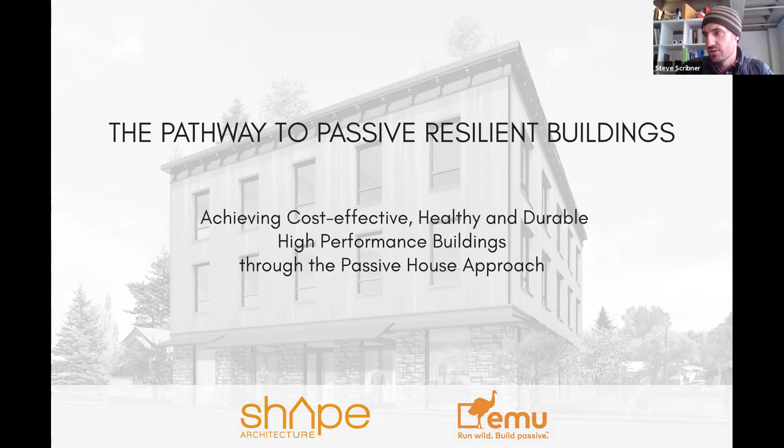So this is actually the cover slide to a lecture I gave with a colleague at Emu Systems. They do Passive House consulting, not architects, but they are trained architects. It was for the AIA last year, and it was really about resilience and durability, not really about energy. So that's just something to keep in mind. I'm going to talk about energy use, but it's such a bigger picture. When it comes to sustainability, durability of buildings is a sustainability tenet. You're not going to have to replace it or replace parts.

So Shape Architecture is Morgan and me. Morgan is remote in Washington now, and he does have another job, so it's basically more me, but he's hopefully going to come back. We have two employees and a lot of active work. This is a little bit out of date, but I'm also a LEED AP. And we're actually up to seven Passive House projects going now.

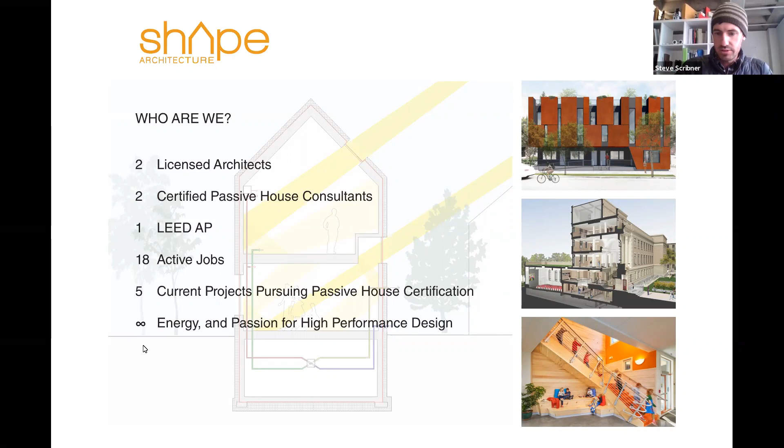So this is just showing a smattering of our building types. There are some of our past projects between Morgan and me at the schools, but we also have a hotel project going in Gunnison, which is climate zone 7, the coldest climate in the continental US, and it's on track maybe to be the first Passive House certified hotel in the US, 18 rooms or so downtown. And then down to tiny ADUs, which is also very sustainable, right? You're increasing density with the least possible material.

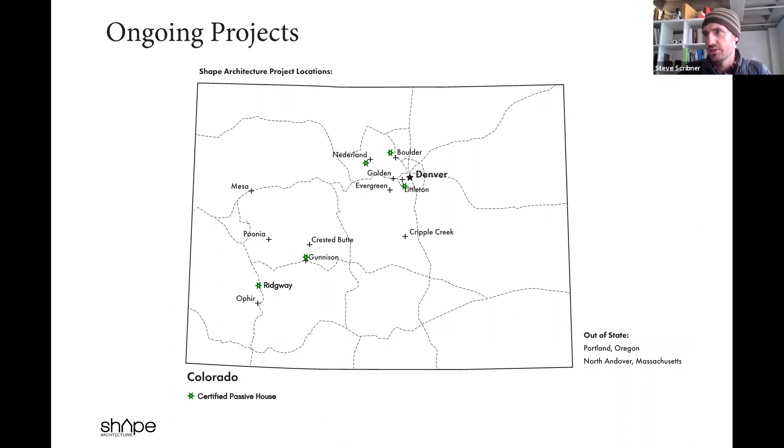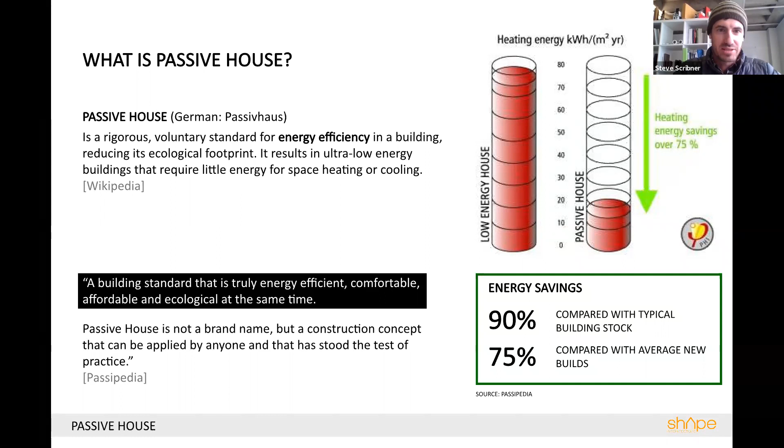And it's a voluntary standard. I kind of talked about this. 90% energy savings compared to typical building stock, like buildings built in the 70s. 75% is compared to code, but it actually depends on the code that's adopted. The codes are making huge improvements. We're already at IECC 2018, which is a little better than 2015, but 2012 was a pretty big jump. So code is getting there.

You can see on this chart that an average existing home uses this many BTUs per square foot. The passive house is down here, pretty darn close to zero, and it's the best way to get to net zero, just a few solar panels. But we're at least halfway there just by meeting code, which is great. There are other issues with code that need to catch up, and halfway is still not far enough.

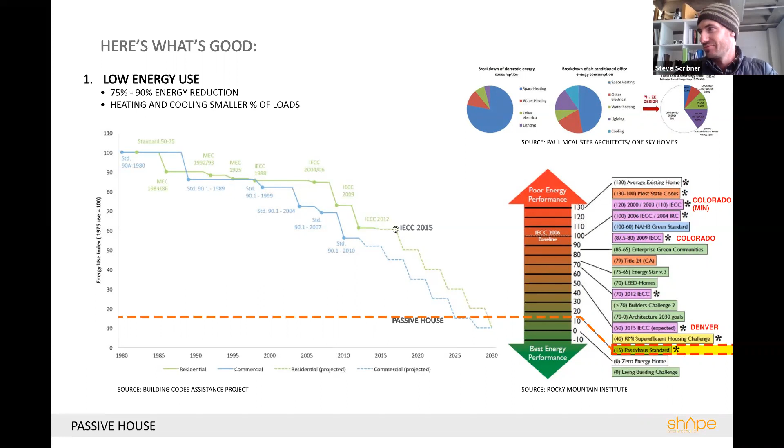So the basic reasons why this is a good approach: the energy use, which we talked about. Number two, though, is occupant comfort. The really good wall assemblies and really good windows mean you don't have local temperature differences. You don't have what's called radiant asymmetry, which is the leading cause of occupant discomfort besides temperature. You end up having really stable temperatures.

So if you're near a window like I am right now, that window next to me is literally 20 degrees. A code window on a day like this would actually be in the 50s. And then you might have a heater going that's much hotter than the temperature you want on a different side of you, or the ambient air temperature. Just because one side of your body doesn't feel the same as the other, it makes you feel uncomfortable. It means you have a much narrower range of comfort.

The other thing that happens is you get a downdraft off of a window if the window is cold, because the cold air drops, and then you end up with a convection loop in a room. It feels like a draft, even if it's not a draft. And additionally, you actually probably have drafts in a typical building, and that's not something that's addressed very well in code right now.

So for a passive house window to be certified, there's a comfort criterion in the standard, so typically in our climate zone you need a triple pane window. The interior surface would be in the high 60s. So if you have a 68 or 70 degree room and your window surface is 66 on a 0 degree day, you're going to feel really comfortable. That's a picture of these kids sitting, touching the window, no frost on the windows.

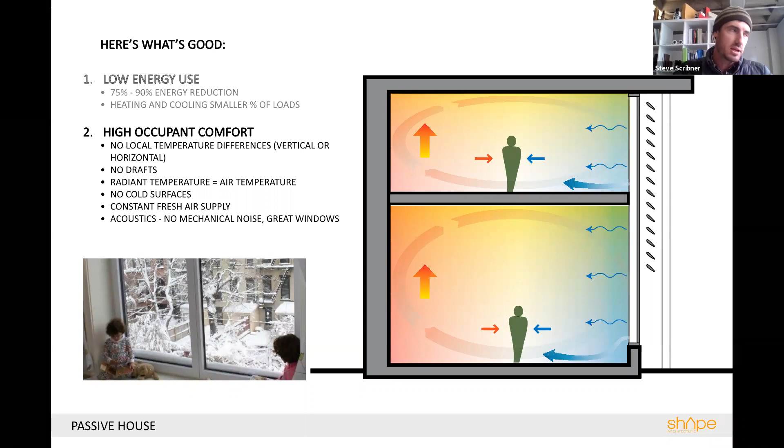And then the energy recovery ventilator also balances for humidity. It's typically more humid inside than outside in Colorado, so that becomes balanced, and you maintain the humidity much better, which is another source of occupant comfort. And then lastly on this list is acoustics. So really good windows, really thick walls, really good air tightness: it's a quiet environment. And if you're near a road, like my office now, it's much more pleasant.

So number 3 is really maybe the most important reason people should build to a better quality, whether or not it's certified passive house. The durability is a really, really big thing. Right now, code is in a bad place because there is a requirement for air tightness, but there's not a requirement for ventilation. And there's also a requirement for a class 1 or 2 vapor retarder on the interior of your wall assembly, which means it'll keep moisture out of the wall in theory.

But they're never built very well. There's no inspections on how well that's applied. And if vapor gets into the wall, it will not be able to get back out. So you end up with a ton of condensation risk. Basically all buildings built right now are gonna have mold issues in who knows how many years, 10 to 20. The other issue is thermal bridging, which we'll talk about. In this case, there's steel studs in the wall that you can see there, and they're bringing cold in from the outside.

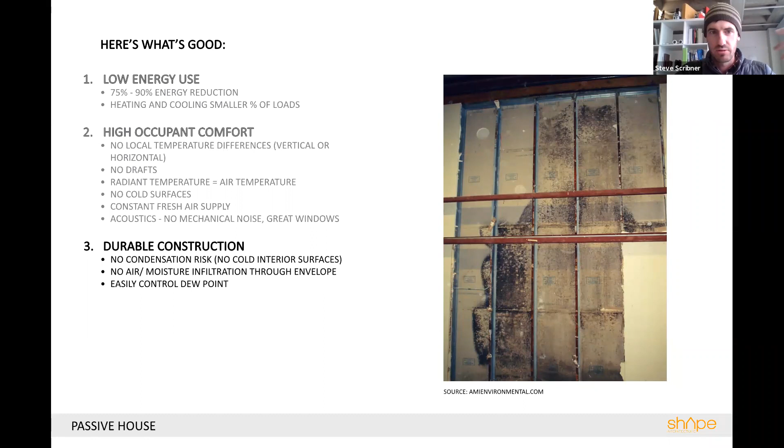The moist vapor that hits those cold studs will condensate, because, as you guys are scientists, the air can only hold a lower amount of moisture at lower temperatures. So it'll condensate on the cold surfaces and turn into water, which is what causes mold. It's not so much the vapor. So the durability is a huge thing from good building science and thinking carefully about the layers. That is part of becoming passive house certified, part of the review, something you think about naturally once you're trained, and part of working really closely with the contractors.

And then the last point here on why it's a good system as contrasted with some other systems. Something like LEED can cost as much as it needs to. It could be ridiculously expensive depending on the complexity of the systems you put in, or it could be fairly cost effective. It's sort of undetermined. With passive house, the idea is you spend all your money on the envelope and you take it out of mechanical systems. In Germany, where it originated, you can take out the mechanical systems almost completely, with the exception of the ERV, and the savings really do close to balance out the additional costs of your envelope.

Here it's a little less close to equal, but in the long term, because the durability is so much better and the mechanical systems get smaller and simpler, the maintenance goes down a lot. So you end up with long-term savings. At certain scales, it's a no-brainer for large buildings that have large capital maintenance costs over a long period of time with long-term owners, like a school; it's going to pay off pretty quickly, or at least over the time they're spending money on it.

So pretty simple diagram: I say 0 to 7% initial cost increase. 0% was something they got to in Pittsburgh, I think; the Pittsburgh Housing Authority has mandated all new affordable, city-built housing is passive house. And they figured out ways to value engineer that made it cost neutral with the way they were building before.

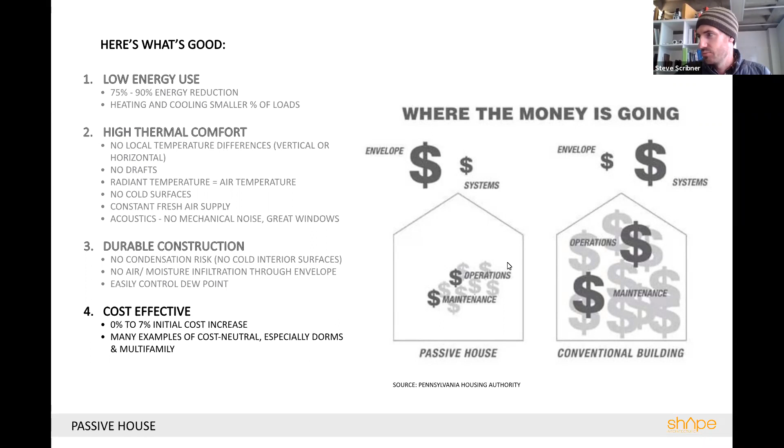And then when it comes down to long-term costs, there's no reason they would ever go back. Having said that, I'll talk later about different assemblies. One good way to do the walls is to do double studs. So right there, you've doubled your framing costs. And right now, lumber is extremely expensive; it's doubled in the last 3 or 4 months. So the cost neutrality is a very hard thing to quantify. Everybody always asks, and you can't put an easy finger on it.

Quick history, I'll try to be super quick. These are 2 pictures of what it is and what it is not. The picture on the left is not a passive house. That is a passive solar house. In the 60s, 70s and 80s in the US, there was a ton of proliferation of attempts at sustainable building. A lot of really great ideas, but the science didn't really work out that great for a lot of them. That's one reason it's not more popular now.

The name passive house is problematic because people associate it with things like an earthship, Trombe walls, or thermal mass in the floors. They're great ideas, but the energy savings associated with these good ideas go away if you don't have an airtight envelope, right? The air just leaks out and takes the heat with it. I mean, they can be really comfortable and awesome.

No slight, but the picture on the right is actually a house that was built in Saskatchewan in the 70s, and it has R40 walls, which is kind of the target for a passive house in that climate now, and an R60 roof. Likewise, we're doing that all the time. And they spend $11 a year to heat that in Saskatchewan. So the ideas were there in the 70s. North America was actually the pioneering place where this stuff was figured out. A lot of things on the left were built, but also some things like this house on the right.

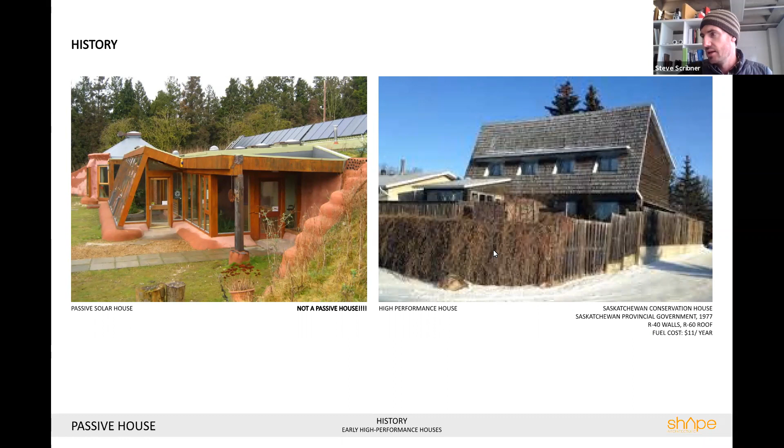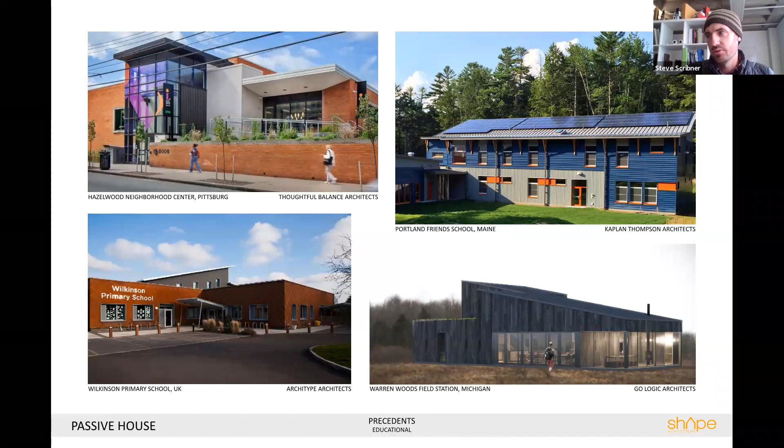I showed this slide because if any of you are going to be involved in the building field and you don't want to do houses, passive house buildings can be anything. The building on the top right is the Portland Friends School. Morgan, who started Shape Architecture, was actually the project architect on that. He had a large part in designing it, and was also central on the team that did the energy modeling for passive house. That was such a success story of why it should be incorporated, and a super happy client.

I'd like to pause. Any questions so far? If no one answers, I'll charge right ahead with the actual science.

So there are 5 principles, 5, not 10. Here they are in German, but there's a little subtitle in English. The obvious first thing everyone would guess is insulation. You need a lot. Then passive house windows is the second thing shown here, and that's tied in with not just good windows, but solar orientation. You want about 50% of windows facing south, with a long axis facing south, basic green building notions you've probably already learned about. But the windows on a passive house become part of the heating system.

You're actually gaining more heat in the heating season than you're losing, by a pretty good factor. So they become at least an equal source of energy to your internal heating system. But that means they have to be oriented right, you have to have enough of them facing the right directions, and they have to be really, really good quality.

And that is the place of the biggest expense on a passive house. But then they also have to not leak energy as well. So you want to have typically a high solar heat gain coefficient, SHGC. Most contemporary windows, the common knowledge is that they should actually have low solar heat gain coefficients, so you don't overheat. And obviously that is relative to the size of the building and the program and the internal loads, et cetera, but rule of thumb.

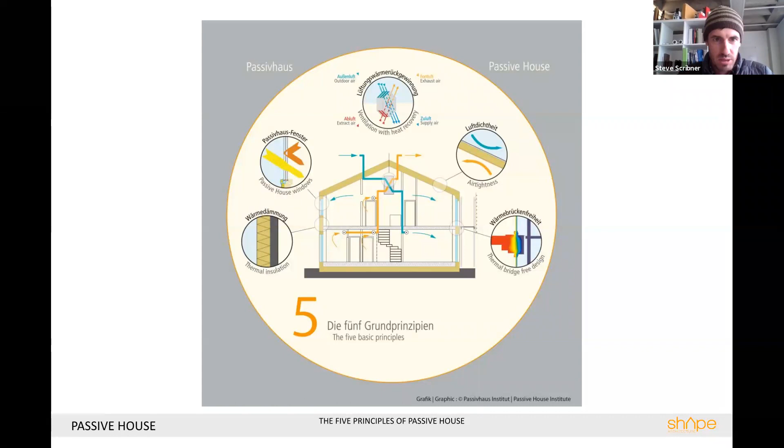And then the last thing, thermal bridge free construction, is kind of where we get to do anything as architects besides add insulation to the walls. We have to think through all the places where, if you have a balcony, how is that going to attach? You can't just cantilever that, because every piece of steel that runs from inside to outside is going to be a problem. So we'll get into that a little more.

So that first point, the high R-value continuous insulation, kind of showing on here what the walls, roof, slab would be. And then that point, I guess this sort of dips into the thermal bridge conversation, but a steel stud means you don't have continuous insulation. That needs to be outside of the studs, or you could have a double stud wall, for instance, and the continuous insulation is between the studs. You know, it just has to not be broken.

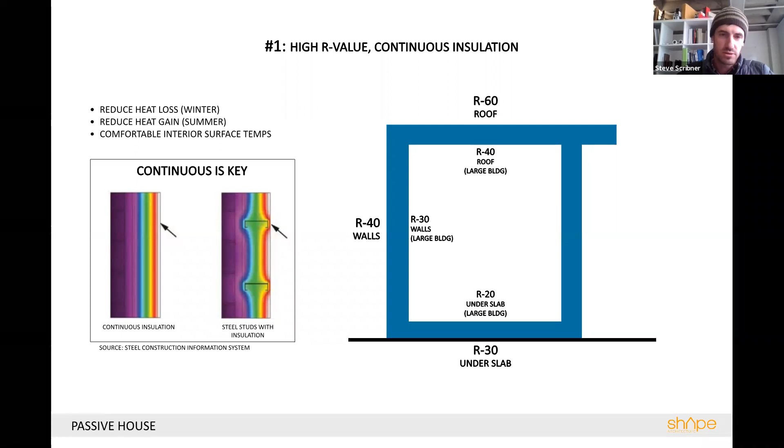And then you have to think about that all the way around. So it's not just like this wall's got it and the roof's got it. How's it connecting from the roof to the wall? How's the window aligning with the insulation so that we don't have a little place where heat sneaks in or cool sneaks in? And then the other part of that is the comfortable interior surface temperatures. So there's the durability that is associated, and obviously energy savings, but then comfort.

And then that air seal, as I was talking about. So the passive house level is 0.6 ACH50. So that means 0.6 air changes per hour. So the volume of the house times 0.6 is the amount of air that can leak through the walls. That actually sounds like a ton of air.

But that's when it's pressurized to 50 pascals, which I can't really give you an analogy for, but if you pop up the house with a blower door, that's just a picture of that, these fans blow it in, crank it up to the target pressure, and then it will leak out at that rate. A code right now, which is fairly new, jurisdictions that have adopted the 2015 energy code allow up to 3 air changes per hour. So we're at 20% of code.

But a standard house, like my office, actually you wouldn't be able to pressurize. It's just like infinite air changes per hour. But a standard house might be 7 to 10 air changes per hour. So getting down to 10% of current construction, 20% of current code construction. So that's where we're really making the biggest difference.

And then there's so many repercussions to that. It has to do with durability. Drafts is the biggest thing in terms of thermal comfort. Moisture damage, so huge. If you have a tiny leak in your vapor barrier, air barrier, you're gonna have a ton of moisture. It's not just the percentage of wall area that has the hole in it that the leak can go through. That will actually be like a funnel. So it'll actually draw more vapor in, and then obviously reducing heat loss.

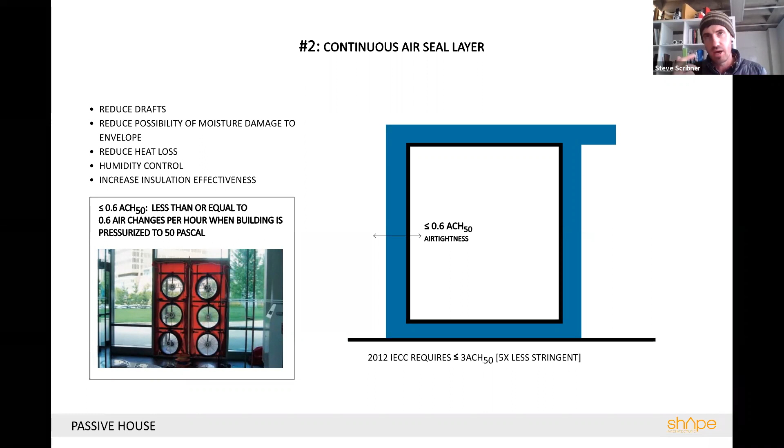And again, the effectiveness of the insulation is only as much as the air tightness. So if you have bad insulation in a stud wall and there's a little wrinkle between the batt and the wall and the stud, air that could get in there will convect from the interior to the exterior and bring that heat energy with it. And it's not just about quantifying that gap. It's also keeping in mind that there's an additional form of heat transfer that will occur.

And then the thermal bridges. A thermal bridge is actually technically any corner, so you actually have to quantify all of the corner conditions. But where it's really a big deal is balconies, or steel or structure that would go from inside to outside. This example is a little tired because everybody shows it, but the Aqua building in Chicago, which is pretty cool architecturally, cheesy, but cool.

Every single one of those balconies is just a continuous slab that goes from inside to outside. So it's literally a radiator, the definition of a radiator, that is heating the air in Chicago around it, and there's no way to mitigate it. I've seen Jeanne Gang talk about this. She designed in these thermal bridge isolators that are basically structural insulation foam, with rebars that come from both sides into this composite that's non-bridging, but it's super expensive. So the builder was obviously like, no.

So since then, Jeanne's like, I will only design things that take it into account in a non-value-engineerable way. So she did another really cool building where they've got a whole superstructure on the outside for balconies. But if you had a steel beam to make it look cool that goes from inside to outside, one steel beam penetrating the envelope has 5,000 times the conductance of the passive house limit of all the thermal bridges. So you just can't do it. That's the most extreme example, but everything we have to be careful about. Eaves are the biggest challenge, how we handle structure going from inside to outside to carry roofs.

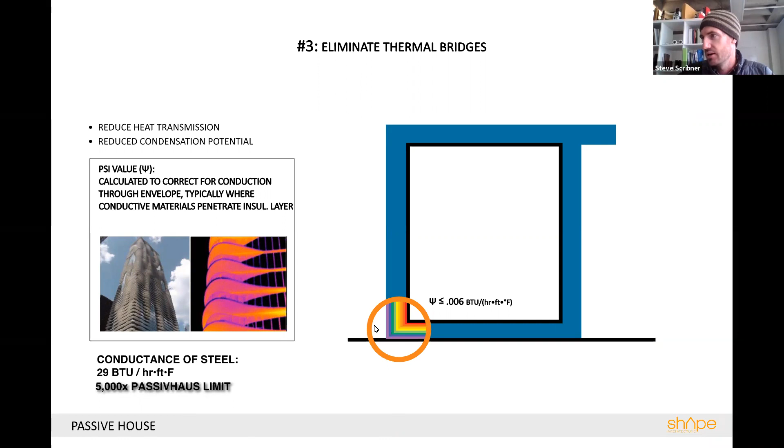High performance glazing, I talked about a little too much earlier, because there's not that much to say here, but it's to think about the actual construction of the window. It's easy to think, okay, triple pane, cool. The triple pane works really well. The R value there is very high, U value is very low. But the frame is actually harder to deal with, especially on operable windows. So they need to be thermally broken if possible.

I mean, I hate PVC windows. It's the cheap, crappy thing. But PVC is actually a really bad conductor, so really good at isolating. So you don't necessarily need thermally broken if the whole thing is made out of uPVC. But a timber window with aluminum clad like this is more beautiful. You see in this image on the lower left how it's constructed with foam between the wood and the aluminum. And then the spacer bars: you have the 3 panes, you have to have something to hold them apart. That has to be low conductivity, and that's a huge source of thermal bridging in windows.

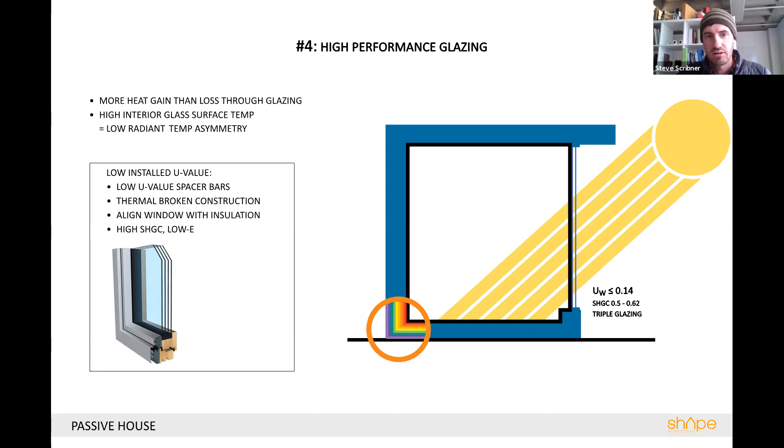So that's something where the cost escalates pretty quickly for a passive house level window, and that's what stops projects the most often. And what's tough right now is it's hard to find a good window. There's passive house level A, level B, level C windows that are good for different climate zones that meet the criteria depending on how challenging the climate is. There's no comparable that I know of for a passive house level D window. The next thing down is kind of, all right, we have a challenge with that.

And then the ERV. This is a diagram of how the air passes, what I mentioned, the warm and cool air pass each other. And it's kind of amazing. You'd think that you could only get half of the heat from the outgoing air, but you can get up to 90%.

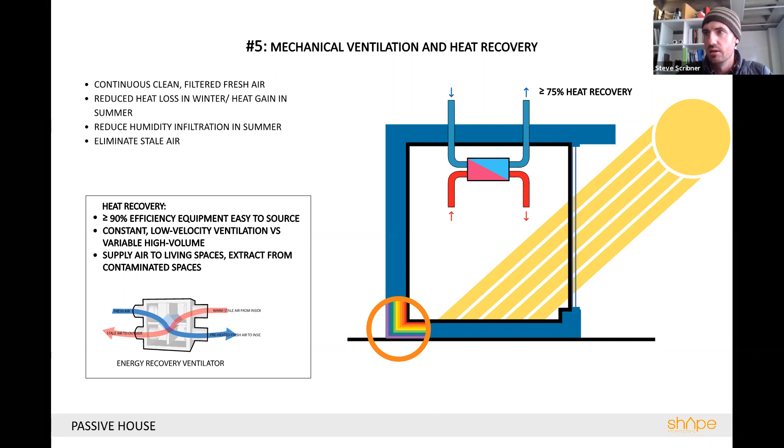And that's one thing that's mandated by the Passive House Institute, to make sure that your ERV is efficient enough. It just has to be super high efficiency. And then besides the fresh filtered air and the lack of thermal losses, the humidity stability is a really huge bonus of that.

And then this image is sort of related to the window thing. The passive solar should be 1/3 of the heat gains, and this is during the heating season, which is dominant in most of the places that we do work. The internal gains, just people, bodies, the computers, the water heater, the other stuff inside the envelope, are going to be 1/3 of the energy.

So if you think about the quantity of that, just a few people and a little bit of low grade equipment adds up to as much energy as the last portion, the heater. So pretty low loads. In a traditional building, the heater would be at least 2/3 of the pie, and the windows would be very, very little of it. And this is factored for their losses.

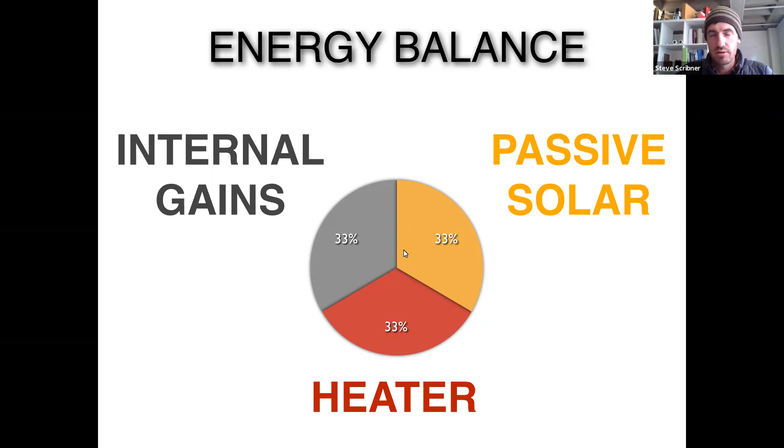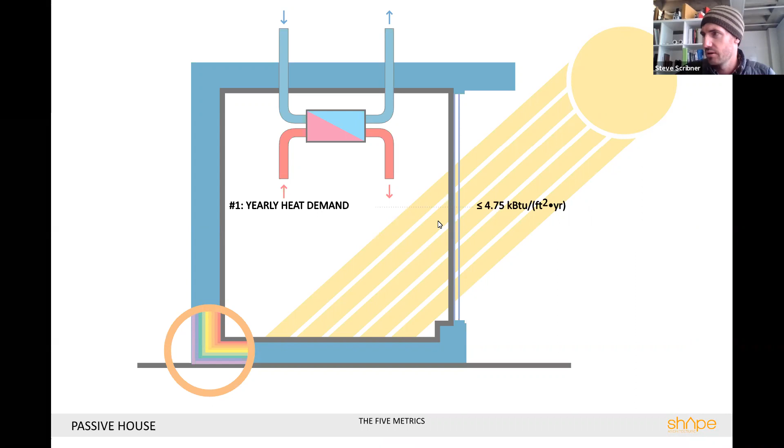So the level, at 4.75 kBtu per square foot per year, just to mention about the metric, to hit the standard you have to show that you're hitting these metrics. You can actually certify based on either your load or your demand. The difference is that the demand is the total heat used over the course of a year, the energy used to produce the heat that you put into your building over the course of the year.

The load is the peak. So on the coldest day of the winter, the rule for it is sort of averaged over the coldest 24 hours of the heating season, I think. In Colorado, it's impossible to use that as a metric. You just can't. It's going to be cold on the coldest day, way beyond what you could heat with this much energy, or compensate for the coldness.

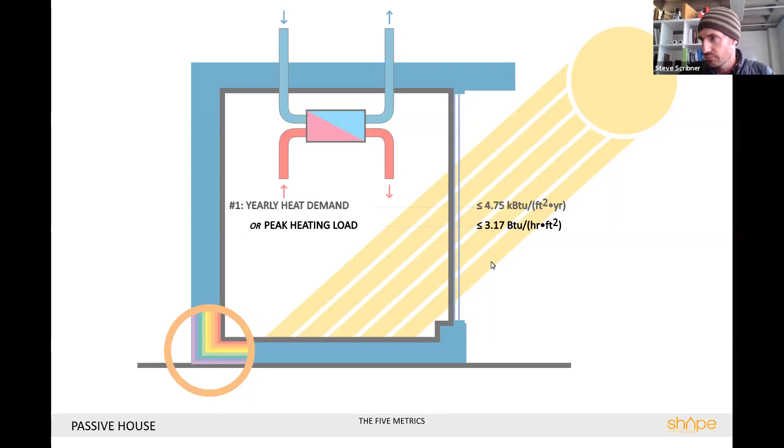The demand is always what we go with. The standard was established in Germany where it never gets that cold, but you also have way less sun. So Colorado is actually a pretty great climate for passive house because we gain so much solar energy over the year that the pie chart is really easy to hit. It's maybe more challenging in Germany where the standard was developed, but the heating load is a viable way to calculate it there. And I'll talk a little more later about why there are those two options.

But then cooling has this asterisk, it doesn't really come up here in Colorado. We do work around the country, and the only place it's been an issue is Georgia. We have this project in Georgia, and even there it's actually slightly a heating climate; the heating is slightly more demand over the course of the year than the cooling.

And even there, cooling is factored for humidity. So it's latent. Anyway, if you have to add additional energy to compensate for humidity, that's allowed, which they kind of have to do, or you wouldn't be able to do passive house in southern regions.

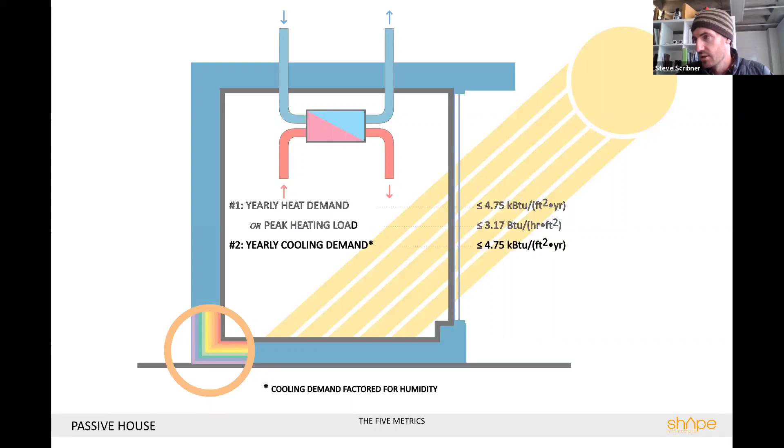But then the primary source energy, again, in houses doesn't really factor in; it always works if it works for the heating. But in larger buildings where you have a lot more internal loads, this would be the driver. The primary source energy demand is not how much energy goes through your electrical meter. You have to factor it by the losses in the system from when the energy was generated. So if you have an electric house that's off grid, you don't have to factor for that.

There are just little losses in your transformers, but the grid is pretty dirty in the United States. You have coal, trains and trucks moving the coal around. There are transmission losses in the power grid, which are quite high. There are losses of efficiency from the fact that the generation plants run 24 hours. So that's factored in, it's a factor greater than 3. So whatever you use in the house, multiply that by 3.3, I think, or it's different in different regions.

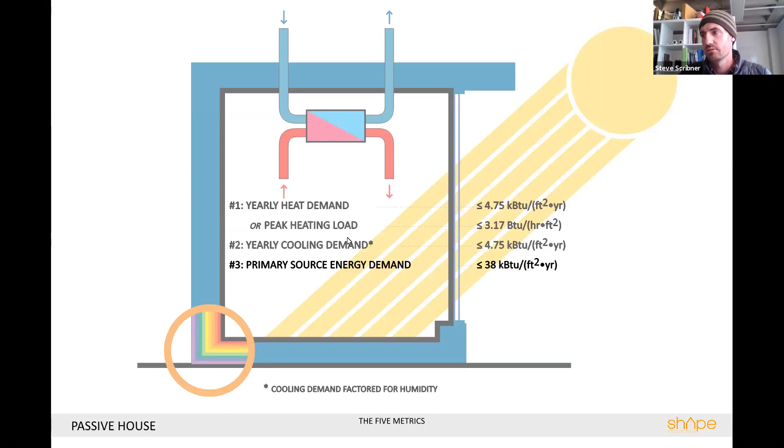That's 38 kBTUs per square foot per year. The metric's kind of hard to relate to, but it is a pretty low number compared to typical. But again, now that there's LED lighting all the time anyway, we don't really have to try very hard on this primary source energy metric, but for bigger buildings, it takes a lot more attention. And then air tightness, we talked about with 0.6 ACH50.

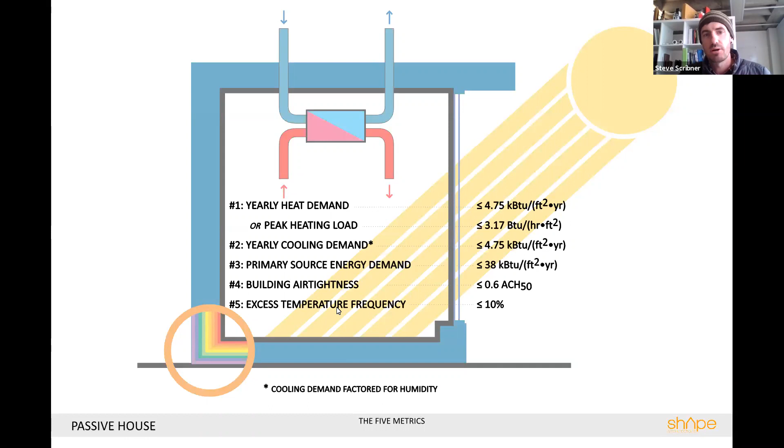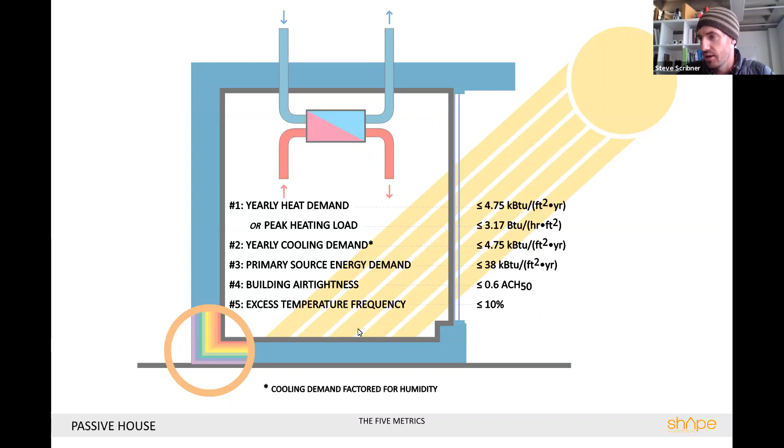And then this last one, excess temperature frequency, that just has to do with thermal comfort. So there's a temperature range, 68 to 77, I think. And anywhere in the house, you would not be outside that temperature range for more than 10% of the time. That window has to meet that comfort criteria, not allow the temperature inside of the room to get outside of that range for more than 10% of the time over a certain hourly period. So that's the one more qualitative criteria, and that's it. Those were all the things for passive house to hit the metric.

And then just a couple of interesting things about why. So the idea here with the heating load was that in a favorable climate, which Colorado is not quite, if you keep under the 3.17 BTUs per square foot per hour, you don't need a heating system. You can just put a little electric resistance heater, as you see in this diagram, on your ERV for the intake air, and it will be enough to keep your house warm within that temperature frequency criteria all year round. So that means you just got rid of your boiler, your in-floor heat tubes, your furnace and the ducting and everything associated with it.

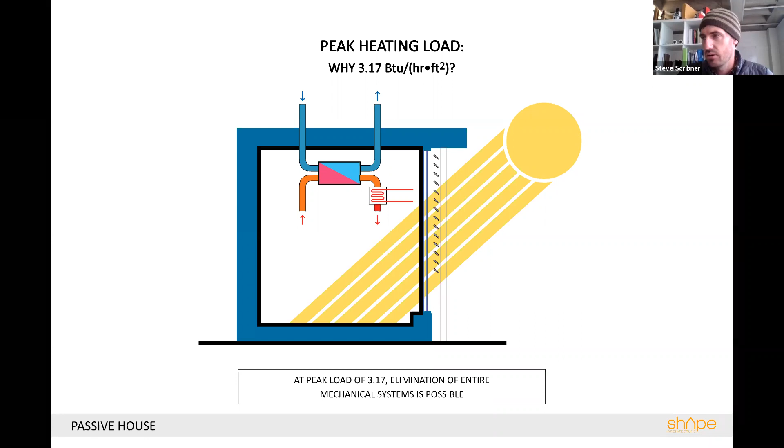And it's just a little electric resistance, which is horribly inefficient, but it's that diagram of the hair dryer, right? If you could just get rid of everything and only have a hair dryer, and then think about maintenance and durability, et cetera. Unfortunately, in Colorado, that doesn't work. We just have colder days. So you'd still need more horsepower to be there for when it's that cold. But that's why that number came up.

And again, in my experience in Colorado, now that I'm doing passive houses and certifying them, that's more theoretical than real. We are having challenges with mechanical systems because often the best thing is using mini split systems, and there's definitely savings, but it's not this theoretical get rid of the equipment, to be honest. But this is why that number is that number. Once you hit that, drop out mechanical systems, reduce the cost a lot, and then you hit the sweet spot where you can continue to get even higher performance, but then you're paying more and your overall cost goes up.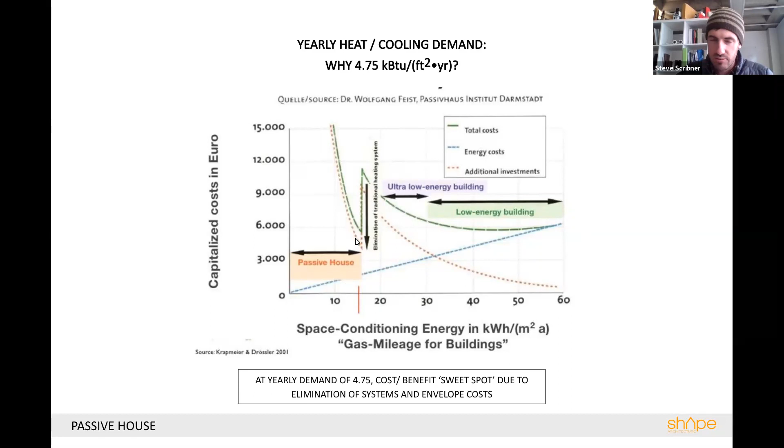But this total cost of the actual heating cost plus the cost of the building, there's that sweet spot. And again, so climate related. And then that 38 kBTUs per square foot per year of total energy use comes from this macro problem we're facing with our species and our planet. This graph was created before we left the Paris Climate Accord. So it's really scary. We're heading into this very red zone of what's going to happen to our species and all the other species, right? Nothing good. It's not looking good.

And if everyone on the planet met the passive house standard with their life, which in a lot of places, people are way, way under the BTUs per year for their lives, living in whatever conditions in whatever countries. If you live in a hut, you don't have any energy use. And there's a lot of people in the world living much below the passive house level. But we in North America and in Europe are just eons above it.

It's terrible. So if we in North America could all hit the passive house standards, and this is Joe Biden's climate plan, right? If we all do, this is the buildings portion of it. We have to do this to get the energy down. You have to do the building science. Then we could stay below the 2 degree Celsius global temperature increase. And again, this graph is from 3 or 4 years ago, so I don't even know what's happening now, but the metric stays the same. That is where that total energy use came from, just thinking macro. And it's achievable and it's very necessary.

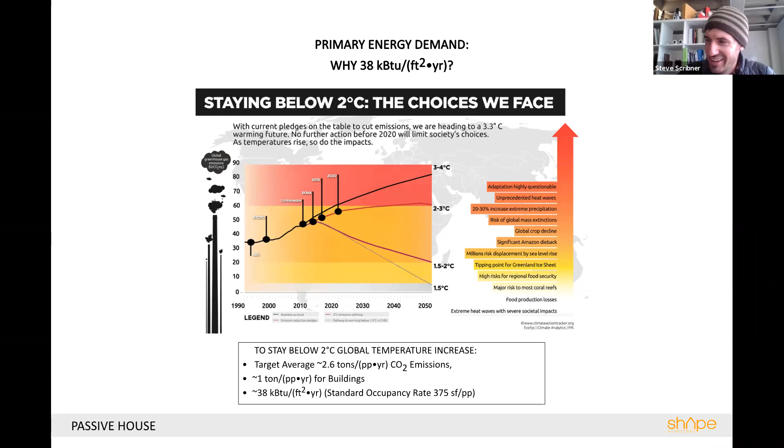So pausing again, any questions on the standard science? Pretty simple.

So yeah, what I love about passive house is it is really simple. I keep talking about building science. When you get into the moisture management stuff, you have to know what you're doing. And then there's a lot of really great collaboration that has to happen with contractors because they're in charge of it, right? If they put a hole in the air barrier, then the whole thing is sunk. So there's education and the right contractors. The contractors that aren't into it, when you say this is going to be passive house, they're going to say that's not worth it, because energy costs are low.

If you're thinking short term and they want to make a buck, they don't want to put in the extra; it takes a ton of extra time for them. It's not really that much materials necessarily, but they need to really pay attention. But if you get a contractor that's interested and wants to make a difference, they have so much power with passive house, right? They're not tracking down product declarations and having to do a bunch of paperwork. There's no paperwork.

They just have to really pay attention and do good quality construction, be testing the air tightness on a more ongoing basis, and thinking ahead about, okay, we're gonna have to wrap a smart vapor barrier, air barrier around this junction in order to keep air from sneaking through there. And if they're a contractor that's interested, then they love it, right? Because they're in control. Whereas with something else, it's just paperwork. So that's kind of cool.

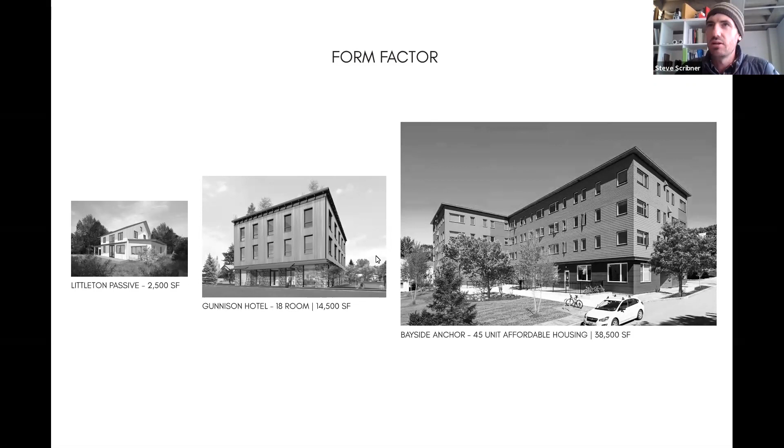Like the clients I have in Crested Butte were like, well, maybe we should make this bigger. I was like, no. We're trying to reduce energy here. You're going to use more energy if you do that. Don't try to hit the standard. So there's that, which is a negative thing, but it also only makes sense to do it on a square foot basis because you just can't hit the same numbers with a smaller house.

So another thing too is you can do it any way you want. This is a very, very contemporary house we're working on right now that's in the permitting phase up in Sunshine Canyon. And it's going to have the most expensive windows you can buy, and they're magnificent, just so beautiful. It's lift and slide doors, huge expanses of glass, which is great. They're oriented perfectly. And good overhangs, so you get good shading in the summer, won't be overheated.

But the details we had to go through to create these. It's a pretty simple concept, like 2 stacked rectangular shoe boxes that are just rotated 8 degrees relative to each other. It's the same number of degrees that true north is rotated from magnetic north. But to achieve that, we have a lot of really complicated details; we're trying to have a flush threshold. So we're adding a little bit of insulation between the blocking below the doors and holding back the slab.

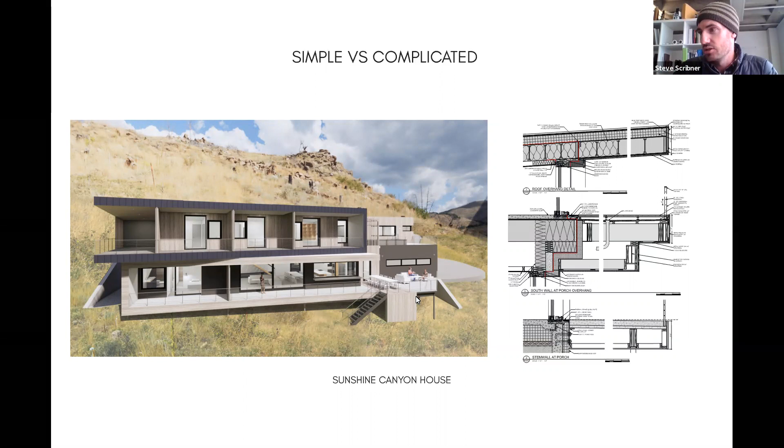Or you can do like this house that I showed earlier. It's really just a double stud wall, and it looks like any other construction. You're stacking a double studded wall on this regular footing. We're not insulating around the footing because we're providing a thermal break between the basement slab and the footing, and then we have the double stud wall. It's thick enough to just kind of cover everything. So that's the other way to do it.

And then twice as many studs, actually, as of 6 months ago, was not adding that much cost. You got the framers on site. It increases their cost, but the framing is not hugely impacting the overall. This project is coming in at like $167 a square foot, which is the lowest we're doing in the Denver area. I don't know how they're doing it. The contractor definitely wants to do passive house, so they're cutting all the breaks they can.

Having said that, I think there was recently like a $40,000 bust because the lumber prices doubled, and it's a double stud wall. So if we'd known that was coming, we might have done a different wall assembly that had exterior insulation, whose prices are more stable right now. But again, that complicated versus simple thing.

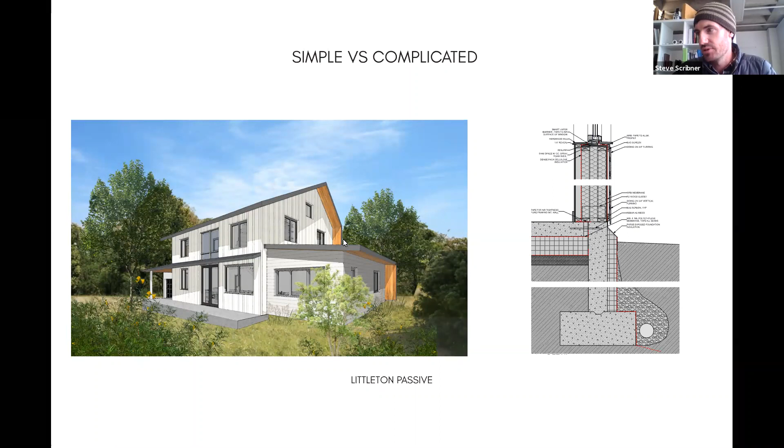And then, just to show off a little bit of this Gunnison Hotel. The tricky part on this one is the ventilation requirements for the commercial spaces on the first floor, and then the doors. We really didn't have a good way to do airlocks. That is a best practice. We should be doing airlocks, having a door into a vestibule into another door, and we don't. So this is going to be really challenging, and we're pushing the envelope.

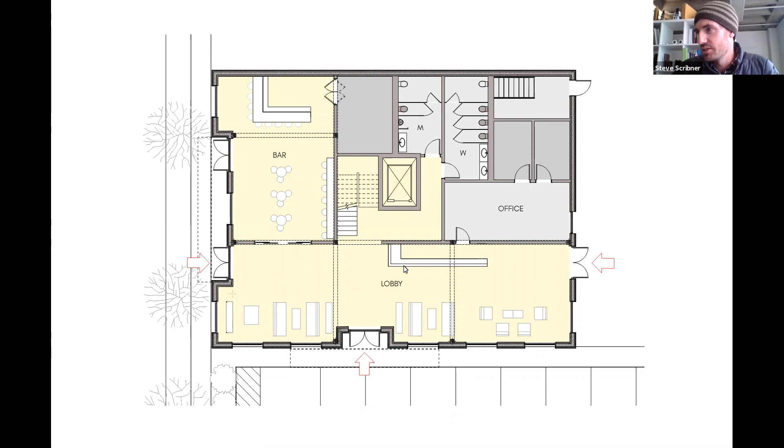Whereas upstairs we have just the rooms, really great windows, really good form factor. It's like the perfect shape, right? It's slightly elongated in the east-west, but because it's sort of square, it's the best form factor you could have for a building this size. And then mix the rooms, and this is showing how we did the analysis on it.

This is a slide that I developed in conjunction with EMU Systems, who I gave that lecture with at the AIA before. So I'm a little bit stealing from them. I don't think they'll mind. We don't do the energy modeling because we don't have time. We're designing a lot of buildings, so it's better to outsource that to the real experts, right? But I was trained in PHPP, which is the energy modeling software, and I would encourage all of you to do it yourselves.

But these guys are really awesome, and they took our ArchiCAD model, brought it into SketchUp, and created this very simple SketchUp model that analyzed the solar energy radiation on each window, depending on orientation. And then they did an analysis of what windows are necessary.

We have these 5 options of windows at different levels of performance: window U values, spacer U values, whole unit U values. And then what if we do an HRV that does not recover moisture, but does a slightly more efficient job of recovering heat, but not energy. So sort of comparing, what if we did this, what if we did that?

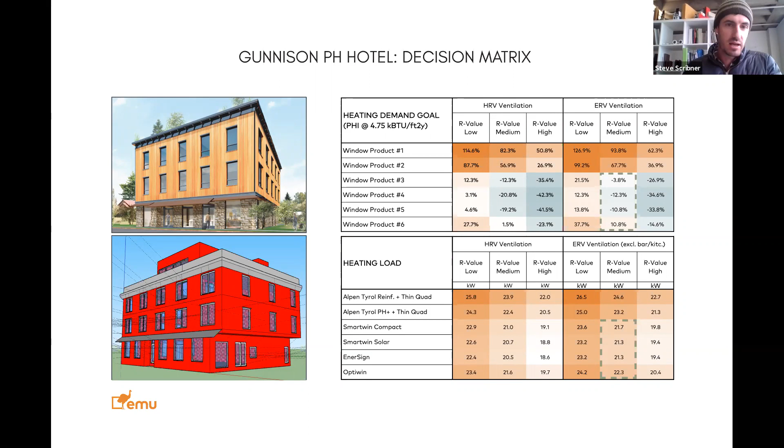So it sort of quantifies how to make decisions when there's all these different variables, like what air tightness is going to be, which window product, which orientation, solar heat gain coefficient. Is it going to be high solar gain, low solar gain? This can run the energy model to show, well, it should be low solar gain in the west and high on the south and east, or something.

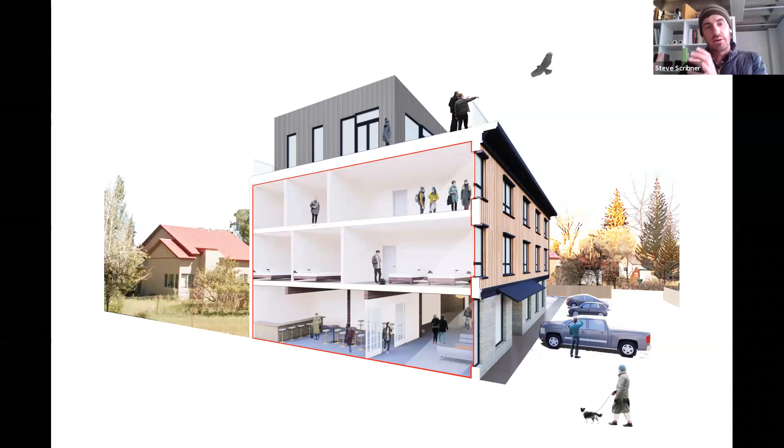Well, no, we haven't had that come up. Basically, all our current certified projects are houses, with the exception of one that's a multifamily building, but still those are sort of like independent housing units, and the ERVs are not mixed, right? We have a 14 unit building with 3 ERVs. So obviously they're serving multiple units, but the outgoing air does not mix with the incoming air. No outgoing exhaust air from each unit mixes with anybody else's outgoing air.

And that is something that's different from some other large ventilation systems. But it's extremely safe with regard to that. And we feel like for this hotel project, it's a selling point. And the other one that is a current event is the fires. So smoke, it's actually very easy. The filters in the ERV systems that come with them are very good, but you can increase the quality of those filters, replace them with a HEPA filter or add a HEPA filter so that they really do have a huge impact on indoor air quality.

And then the fact that they're continuous really takes away the potential for leakage. The worst thing in buildings is when you don't have continuous ventilation, and all the air you're breathing is sneaking in under the wall, through the joints. And that means you're getting the smoke from the wildfire in addition to the mold that might be in your wall. So yeah, the Passive House being really airtight is a great fit for today's air quality.

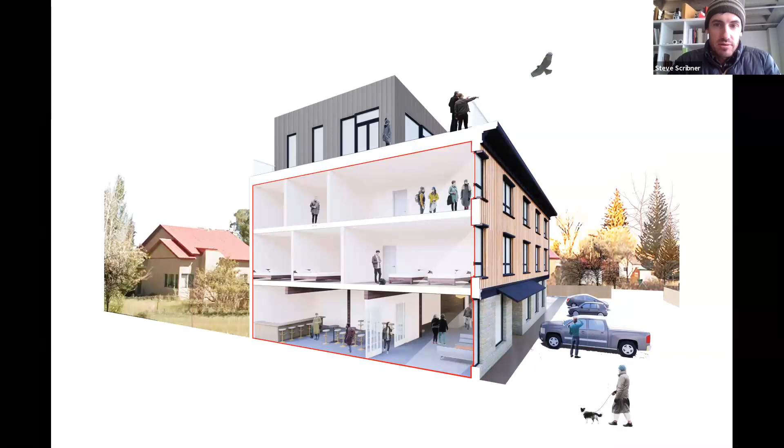I think a lot of it is the ventilation systems that not only take energy, but also are a source of loss of energy through taking air out of buildings. So, schools have been done here, and office buildings for sure. It's not a big deal. The high occupancy stuff where you have a lot of ventilation requirements is where it gets challenging. And then where you have a lot of coming and going, like our hotel first floor makes me nervous, but the systems are okay with it.

But no, I think it would not be a good fit for your parking garage. Unfortunately, you can't get really good garage doors, and you don't want an interior environment for your parking garage. So, yeah, I don't know the answer all the way through, but more than you think can be done. Okay, that makes sense. Thank you.

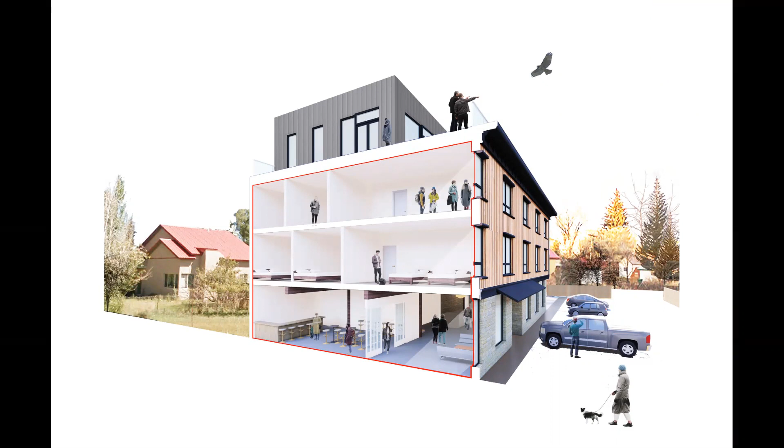Yeah, it looks like people are. Any other questions, or should we let people go? I'm happy to field any other questions. I have a question for you.

Yeah. Was it tough for you to transfer from being a physicist to getting a master's in architecture? Because I'm honestly really thinking about that track, and maybe architectural engineering instead, to be more on the structural side. But how hard was that for you? Did you have to take a lot of prereqs because you didn't have a background in architecture? No, it was easy. It was great. Well, actually, I take that back.

So I was lucky because I had taken 2 classes in architecture as an undergrad, and then I worked as an architect. I was just super lucky to be able to get this job. I don't know what stars aligned. So I was able to skip. There would have been a requirement for a summer intensive, which I highly encourage if you're considering it. A lot of schools offer it. I went to Parsons, the New School in New York. I don't know if Boulder has one. It's a summer intensive pre-architecture program that you can take.

But I would recommend doing it because it throws you in the deep end. You just kind of practice. You do the things that you do in architecture school, and you find out, like, this is actually terrible, I don't want to do it. And I was able to get out of that because of my work. But I think it's great for architecture schools to have people from all backgrounds.